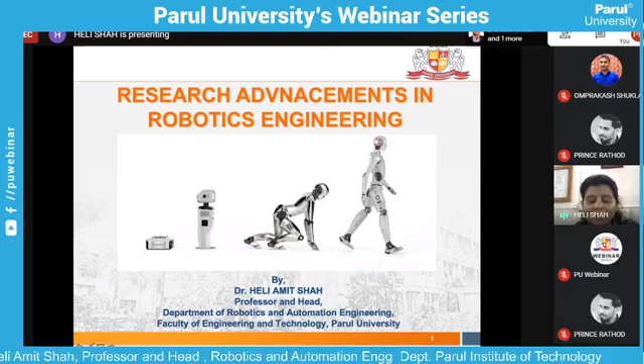The topic for today's presentation is research advancements in robotics engineering. As we can see in the diagram, there is a small two-legged robot, then one like a monkey or animal, and then one like a human. So just as humans have advanced, robots have also advanced from a small machine to a humanoid robot. That is what we are going to see today in today's session.

Before going further, I would like to tell you what is a robot. The word robot was coined by a Czech novelist, Karel Čapek, in 1920, in a play titled Rossum's Universal Robots, RUR. Robot in Czech is a word for worker or servant. So basically, Czech people use it to mean a worker or a servant. It originated from the word robota. So the origin of the word robot is the play and the word robota.

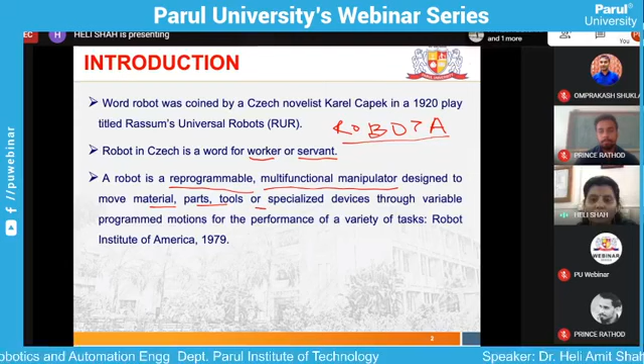But the actual definition of a robot is: it is a reprogrammable, multifunctional manipulator designed to move material, parts, tools, or specialized devices through variable programmed motions for the performance of a variety of tasks. This definition was given by the Robot Institute of America in 1979.

At the same time, Asimov also gave the laws of robotics. On the basis of these laws, the robot has to behave. People designing robots have to see and design the robots based on these laws.

The first law was invented, and then the 0th law came into force. That law states that a robot may not injure humanity or, through inaction, allow humanity to come to harm. So whatever you are developing as a robot, it should not injure humanity. Law 1 states that a robot may not injure a human being or, through inaction, allow a human being to come to harm, unless this would violate the higher order law.

Law 2 states that a robot must obey orders given to it by human beings, except where such orders would conflict with the higher order law. That means if a human being tells a robot to injure a second human being, the robot must not obey it, because it violates Law 1.

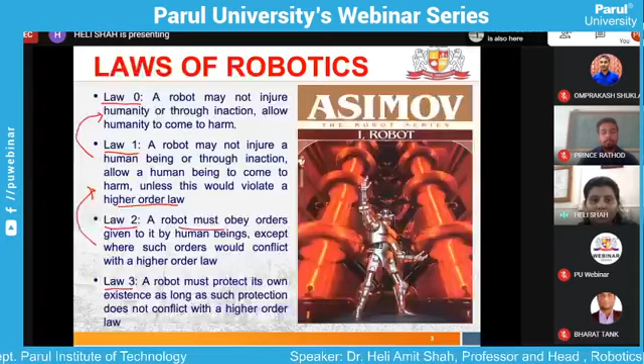When was the first robot developed? Actually, the idea of a robot existed years ago, but the first actual programmable robot was developed in 1954, designed by George Devol. George Devol is known as the father of robotics, who coined the term universal automation. He later shortened this to Unimation, which became the name of the first robot company, in 1962.

The first robot made by him, as shown in this diagram, is known as Unimate. Unimate is basically automated. It originally automated the manufacture of picture tubes. So this was the first programmable robot.

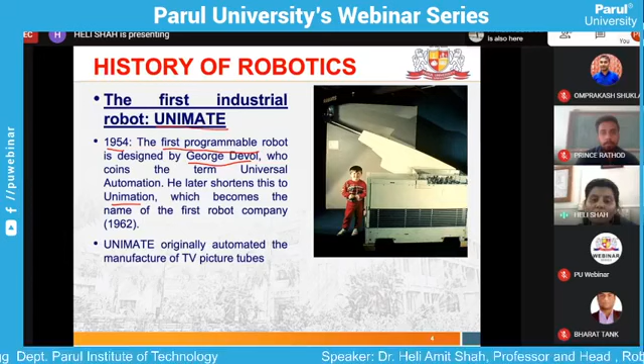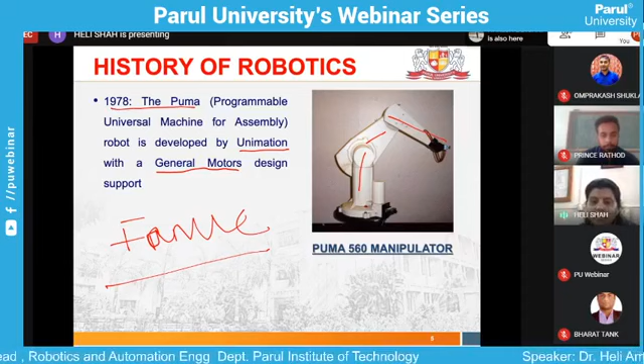In 1978, Puma, Programmable Universal Machine for Assembly, was developed by Unimation, with the help of General Motors as well as Fanuc. Fanuc along with General Motors developed the robot Puma, which is shown here. This robot is just like a human arm and it acts as a human arm.

Then in the 1980s, the robot industries entered the phase of rapid growth. You can see here, this is a SCARA robot, then this was In-Sight robot, then it was the technology manipulator, Barrett technology manipulator, and from then onwards, many institutions introduced programs and courses in robotics.

Robotic courses are spread across mechanical engineering, electrical engineering, and computer science departments. From the 1980s till 5-6 years ago, robotics was not a specialized branch, but was part of either mechanical engineering, electrical engineering, or computer science department. Nowadays, we have robotics as a specialized branch of BTech.

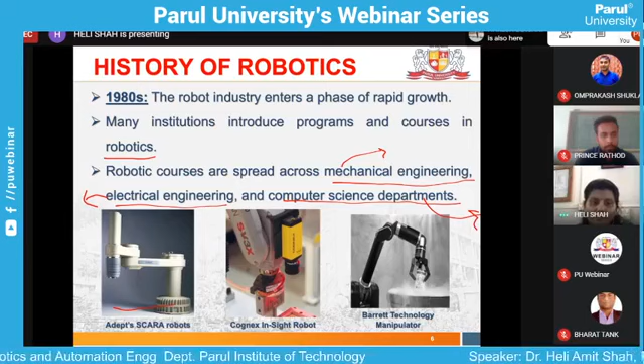Then in 1995, there were so many emerging applications in small robotics and mobile robots, which drove a second growth of startup companies and research.

And in 2003, robots went to space, where NASA's Mars exploration rovers were launched towards Mars in search of answers about the history of water in Mars. You can see this diagram, this is the space robot which was developed by NASA.

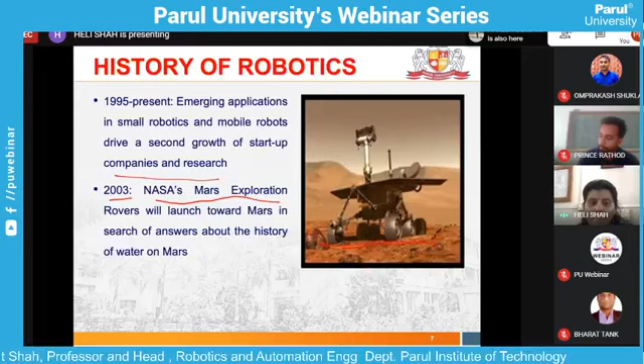If I want to learn robotics, what knowledge should any student or person who wants to work in robotics have? He or she should be capable enough in modeling and analysis of dynamic systems, feedback control, sensors and signal conditioning, actuators and power electronics, hardware and computer interfacing, and computer programming.

These first two things deal with control theory or control system theory. Sensors and signal conditioning deals with instrumentation, controls, and electronics. Actuators and power electronics deals with electrical and electronics. And these two are interdisciplinary, combining computer electronics and electrical.

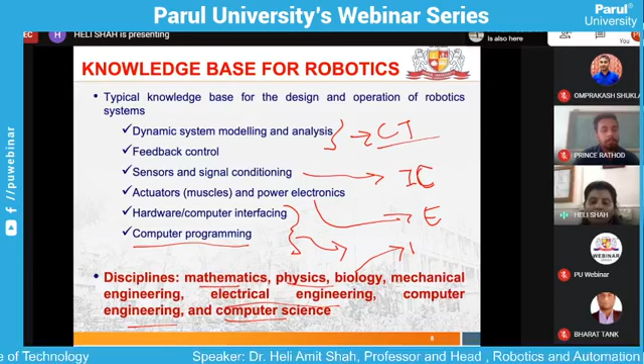So if I want to develop a robot or work with a robot, I should be good enough at mathematics, physics, mechanical engineering, electrical engineering, computer engineering, and computer science. Now biology is also added here because biomimetics and humanoids exist, because of which biology is also added into the knowledge base.

What are the key components of any particular robot? It requires a power conversion unit. If you want to convert from AC to DC, or from DC to AC, you need a power conversion unit, which is a main component of a robot. Sensors, actuators, controller to control the robot, user interface to give commands by the user, and the manipulator which manipulates the actions of the robot.

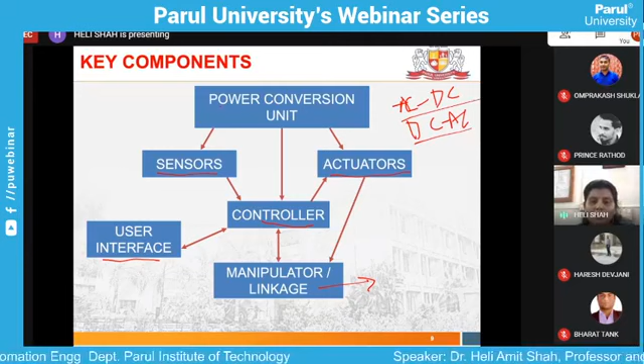When we talk about robots, there are two kinds: a fixed robot and a mobile robot. You can see here in this diagram, this is the fixed robot. These robots can be used in manufacturing companies or companies where you have assembling work, work which a robot can do by sitting or staying at one particular place.

Then we have mobile bases, which can be achieved with the help of wheels, or with the help of legs, or with the help of tracks. And we can say that these robots can move anywhere and they can work accordingly.

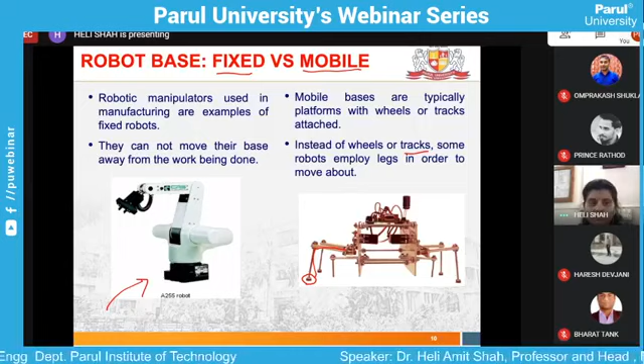Which sensors do we require if I want to build a robot? If I talk about the 5 basic senses of a human being, what we have are eyes, ears, nose, skin, and tongue. Similarly, sight that is eyes, sound, touch, taste, and smell. These are the senses which we have.

Similarly, apart from these 5 senses, robots should have the ability to see in the dark. Also, it should have the ability to detect tiny amounts of invisible radiation, because if I want a robot to work in a hazardous area, it should also measure movement that is too small or fast for the human eye to see.

When there are rapid things happening in front of our eyes, we cannot measure those things precisely. Similarly, a robot should be able to measure such things. The robot sensor should be sensing the environment around the robot, sensing obstacles, sensing the presence of toxic gas, arm position, anything. For that, we have different sensors available.

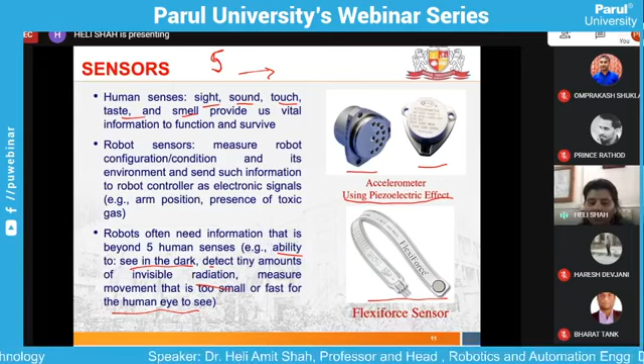Then we have flexiforce sensors, which are there in robotics. Then we have vision sensors. In-sight vision sensors are also there, and 3D vision sensors are also there to sense the vision. They are basically used to pick bins and perform inspection. For pick and place robots also we can use the vision sensor.

For part picking, a robot can handle vision sensor workpieces that are randomly piled by using a 3D vision sensor. So whatever pieces are randomly placed here, here, here, a robot having a vision sensor can take all the pieces and pile them anywhere. This can be constructed at very low cost.

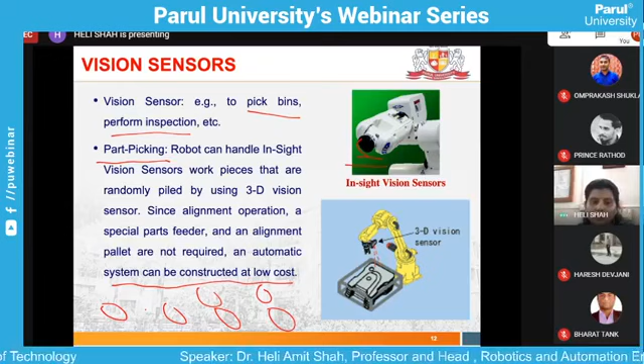Then we have the force sensor. Robots are used in surgery, robots are used in part fitting. When they are used in surgery, we need to fit something into the human body, so that is insertion of something or fitting some part. For that we can use the force sensor, which can apply adequate force for inserting something into the human body. So for that, a robot can do precise fitting and insertion of machine parts also.

If I have a very small gap, my fingers would not be able to handle those small materials because they may slip out of my hand. And if there are large materials, I am not capable enough to handle very large or huge materials. At that point, if a robot can hold those small or large materials and insert it inside the machinery, or inside the human body, it would be very much helpful. So for that we need a force sensor.

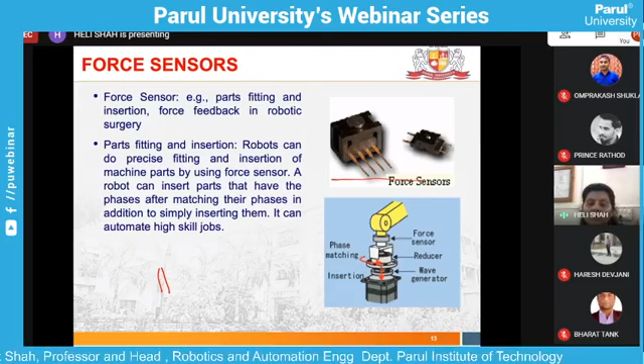Then there are proximity sensors. Now what is a proximity sensor and where are proximity sensors used? Proximity sensing is the technique of detecting the presence or absence of an object with an electronic non-contact type of sensor. You can see these are proximity sensors and they have ultrasonic range. With these sensors, we can detect either the presence or absence of any object.

With this sensor, this particular car is being built. You can see in this car there are 6 proximity sensors. These are the 6 proximity sensors you can see here, these lights. You can see here the sensors, these 3 plus these 3, these are the 6 sensors. So 6 ultrasonic sonar transducers explore wide open areas, and you can detect an obstacle from 15 centimeters to 3 meters, which is a wide range.

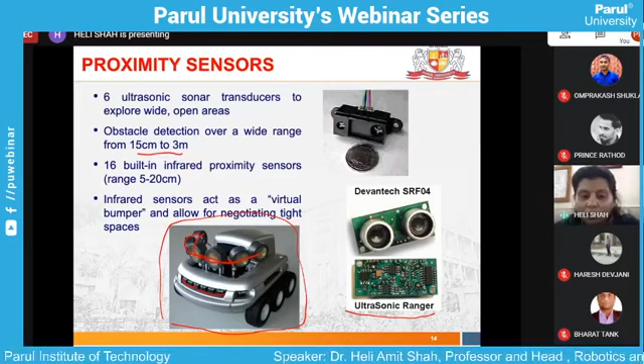And you have infrared proximity sensors. Why infrared? Because they act as a virtual bumper and allow for negotiating tight spaces. So if a car has this kind of sensors, we can avoid collisions, because sensors will sense an object and give the signal, so there will not be any kind of collision.

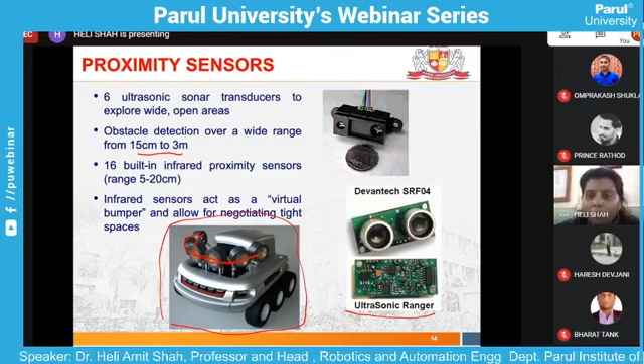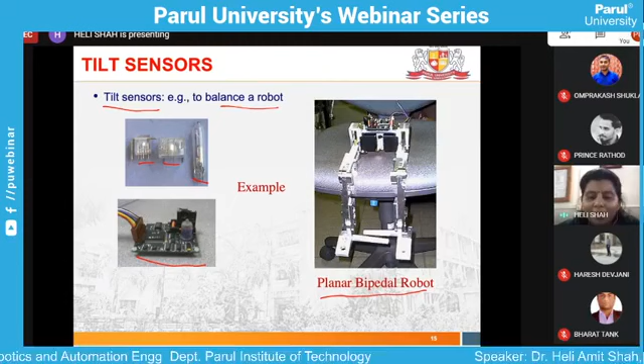Then we have tilt sensors, which balance a robot. When we are talking about a humanoid or a robot doing some particular work, this is a planar bipedal robot which employs this kind of tilt sensors. These tilt sensors are there and they can balance a particular robot.

Just as the human body has muscles, similarly robots have actuators which utilize combinations of electromechanical devices like synchronous motor, stepper motor. This is the AC motor, AC servo motor, brushless DC servo motor and brushed DC servo motor. These are employed particularly for having rotary movements in the robot, for having some particular speed conversions in the robot. So we need actuators.

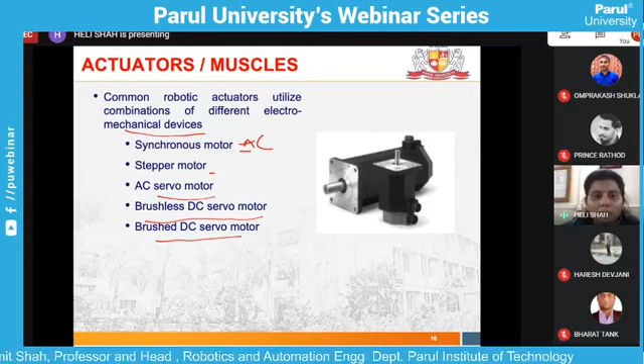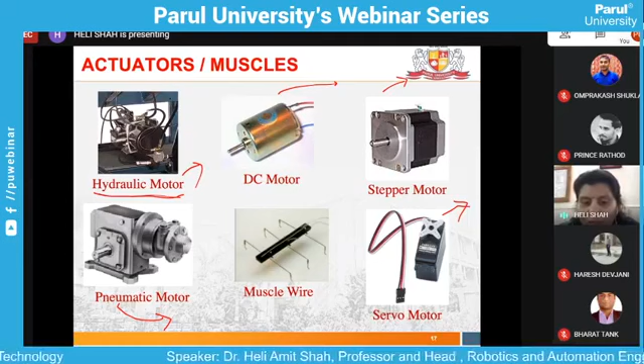These are the common actuators which are used: hydraulic motor for high power applications, pneumatic motor for low power applications, and very widely used motors in robots are DC motor, stepper motor, and servo motor. These motors can be used in a robot for any application where you don't require high power, and these electric motors will give high efficiency. These are the wires with which we can fit in the robot.

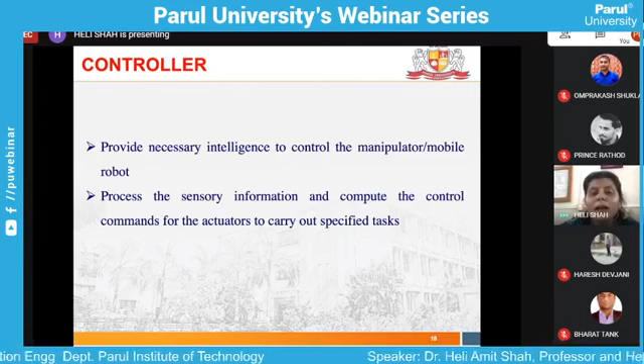By inserting all these elements, we also should have the controller to control all this, which provides the necessary intelligence to control the manipulator or a mobile robot. We need to control a particular robot, and this can be done by a controller. There are different kinds of controllers available these days for a robot. We can control it using Firebird, Arduino Uno, or ARM Cortex controller. These are some of the devices.

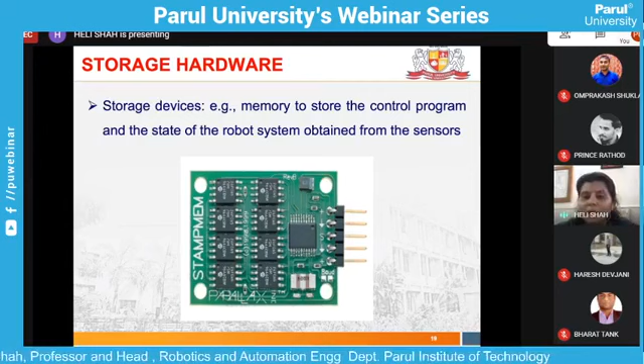Since robot is a programmable device, we also need some kind of storage, because we will store our program in the storage device, then it can be loaded into the controller, and the robot can execute a particular task. So we can have memory to store the control program and the state of the robot system obtained from the sensors. Then we can have computational hardware which does all the computations, all the controls of the robot.

This is the PIC controller. Instead of this PIC controller, we can have 8051. Instead of this 8051, we can also have Firebird. So we can have any particular controller depending upon our application.

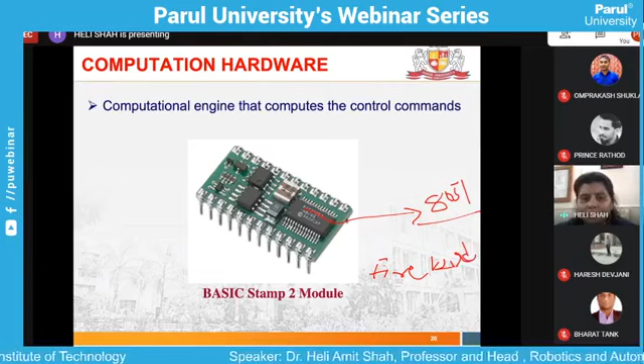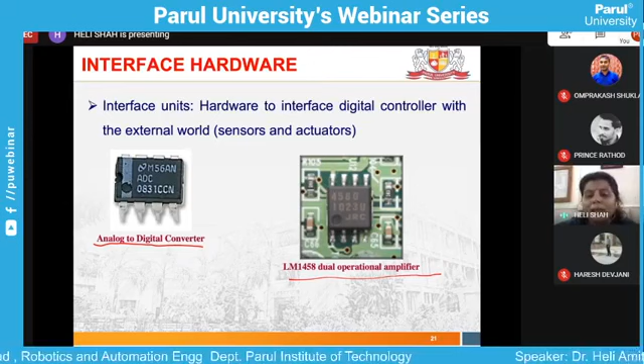Then there is some interface hardware, because whatever sensors give us is an analog signal. We need to convert that analog signal to digital signal using ADC, and then we also need an operational amplifier, particularly to do some particular operation, like amplifying the signal, adding up two signals, or doing differentiation or integration of a particular signal.

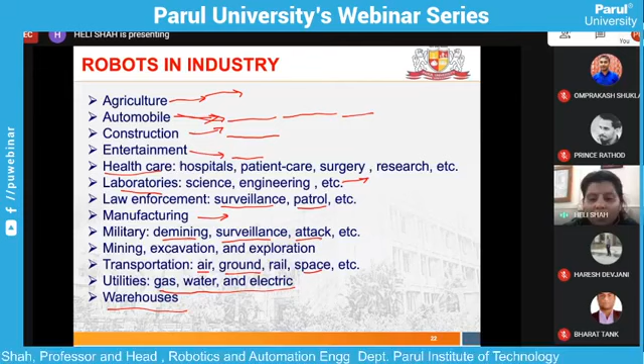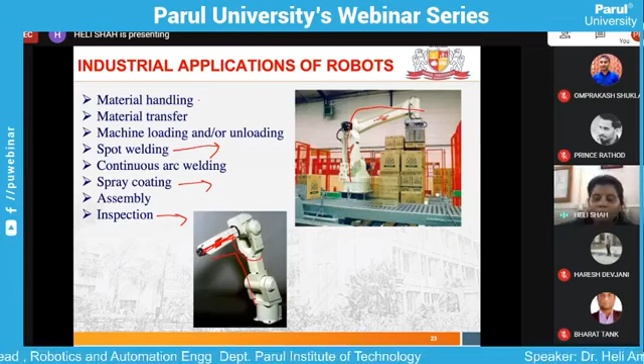What is the advantage? We can send robots to explore space without having to worry about their safety. We want them to last for so much time in space, and we need them to stick around long enough to investigate and send us information. But even if this fails, the humans involved with the mission will stay safe.

So we are not harming the life of a human being by sending a robot to space. Again, it is very much cheaper than sending a human. Why is it cheaper? Because a robot doesn't need to eat, sleep, or go to the washroom. They can survive in space for many years and can be left out there, right? No need for a return trip. So it is so much cheaper to send a robot to space than to send a human being.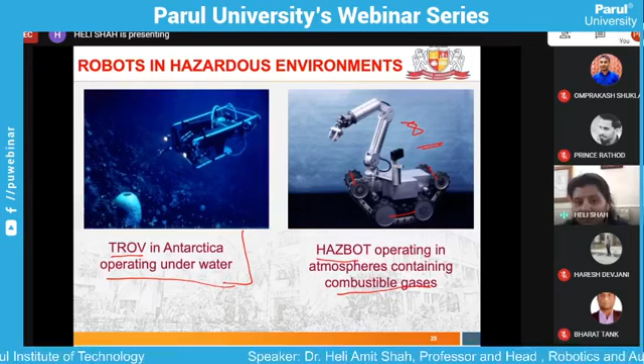Then this is the Hazbot. You can see it here. Why is it called Hazbot? Because it has 6 wheels and 2 at the back, so there are totally 8 wheels. It operates in atmospheres containing combustible gases, where human beings can't survive. So the places where human beings can't survive, robots can very well go and work.

Medical robots - see, this one uses a force sensor. It is the robotic assistant for microsurgery. This is a small part which has to be inserted inside the human body, and this can be done with the help of a robot hand.

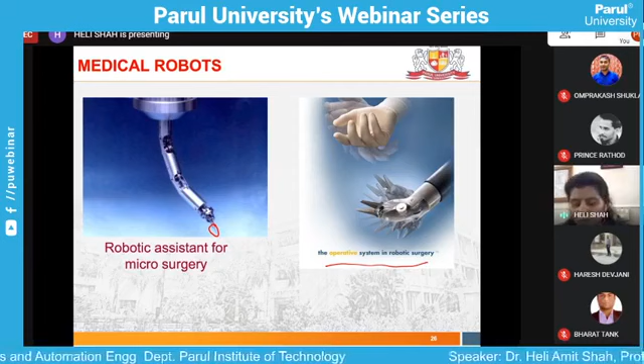Similarly, the operative system you can see is just like a human hand, and this has been done with the help of a robot. You can have surgery with the help of a robot.

Then in the military, these are used for strikes. Deployed from a sub's hull, Manta could dispatch tiny mine-seeking AUVs or engage in more explosive combat. This was Predator, Global Hawk, Golden Eye, and I-Star. These are used extensively in the military.

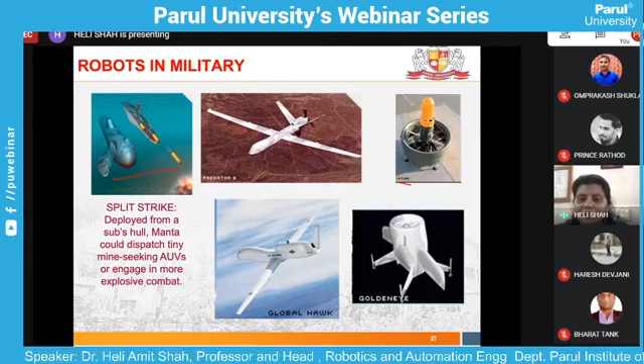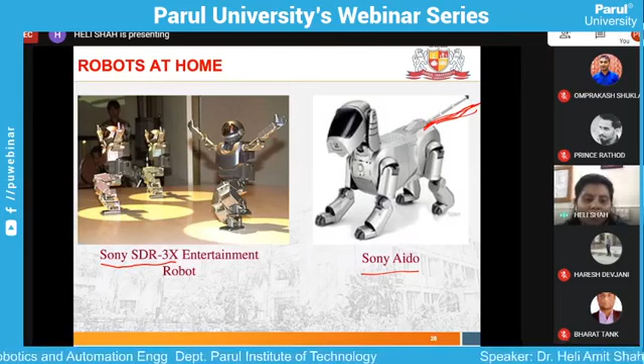Then at home, this is the entertainment application. Sony has developed SDR3X, which is an entertainment robot. And this is another one, Sony Aibo. You can see this is a transmitter. So you can employ these anywhere and they will provide your entertainment. These are the entertainment robots.

Then the most important thing, which came from 2016 and 17, humanoid robots. The first humanoid robot was Sophia, a social humanoid robot developed by the Hong Kong-based company Hanson Robotics. It was first turned on February 14, 2016, and made its first public appearance at the South by Southwest Festival in mid-March 2016 in Austin, Texas. So the first public appearance of Sophia was in 2016.

In 2017, Sophia became a Saudi Arabian citizen, thus becoming the first robot to receive citizenship of any country. Sophia is the first robot to receive citizenship of any particular country.

Then our own Indian robot, Mitra. Mitra is a humanoid robot developed by the Indian startup Invento Robotics in Bangalore, and it was founded by Balaji Viswanathan. It made its first appearance in November 2017 at the Global Entrepreneurship Summit, where it greeted Ivanka Trump, senior advisor to the US President, and also interacted with Indian Prime Minister Narendra Modi. Since then, we all know the journey of Mitra.

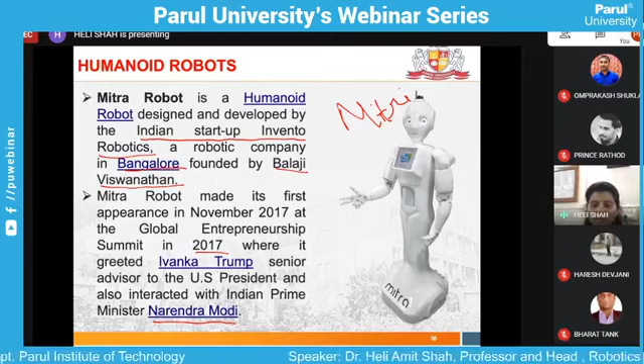Then in 2020, we had the worst phase of our life wherein COVID-19 caused disasters across the entire world. At that point, robots were so much of help and use. Different countries used robots in COVID-19 - almost 16 countries used robots in public safety, public works, and non-clinical public health. They also used them in quarantine enforcement, disinfecting public spaces, and identification of infected persons.

How do they do this thing?

They do this with the help of testing, public service announcements, and monitoring traffic flow.

There were about 7 countries who use robots extensively in clinical care. This is where robots are used extensively, though slowly and gradually the use has decreased here. This includes disinfecting the point of care, meaning disinfecting the entire hospital, healthcare worker telepresence where a robot can make a video call to a healthcare worker, prescription and meal dispensing, patient intake and visitors, and patient and family socializing. This is what robots were doing.

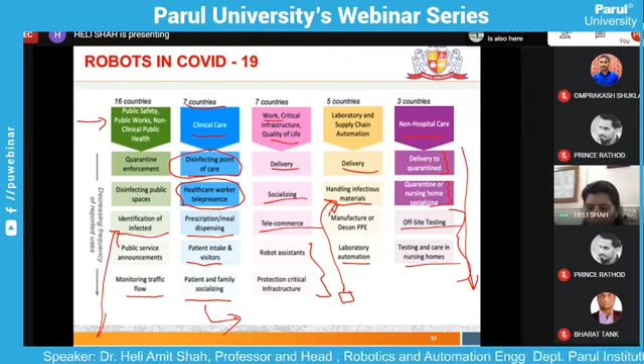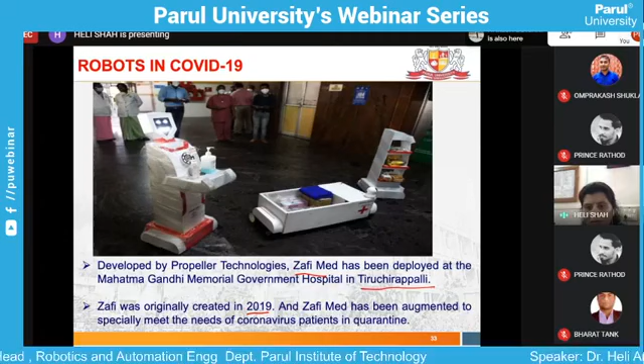Then this was the Zafi Med, developed by Propeller Technologies, deployed at the Mahatma Gandhi Memorial Government Hospital in Tiruchirappalli. It was originally created in 2019, but was augmented to specially meet the needs of coronavirus patients in quarantine. You can see it can take things from these particular cupboards and serve them to patients.

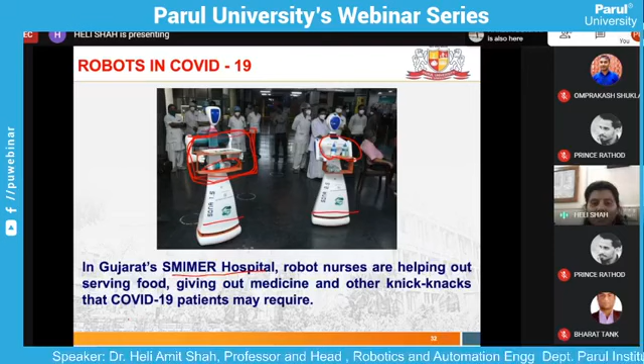Now if you see these Mitra robots, some of them have screens over here. Because of these screens, the Mitra robots can interact with humans admitted in the hospital, and they can socialize with their family members also.

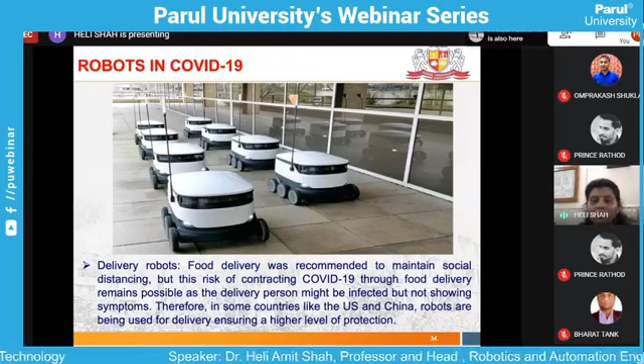Then these are the delivery robots used in COVID-19. You can see they have big tanks, and food delivery was recommended to maintain social distancing. But the risk of contracting COVID-19 through food delivery remains possible, as the delivery person might be infected but not showing symptoms. So in countries like the US and China, robots are being used for delivery, ensuring a higher level of protection, because we never know if the person coming for delivery is infected or not, right?

Then drones in the form of robots were used in various countries to monitor and disinfect the streets during lockdown. In Spain, police flew drones with speakers around public places to warn citizens about the coronavirus lockdown. In UAE, drones are being used to disinfect pavements and public squares. So we can say they are used for disinfecting, and even for monitoring the public.

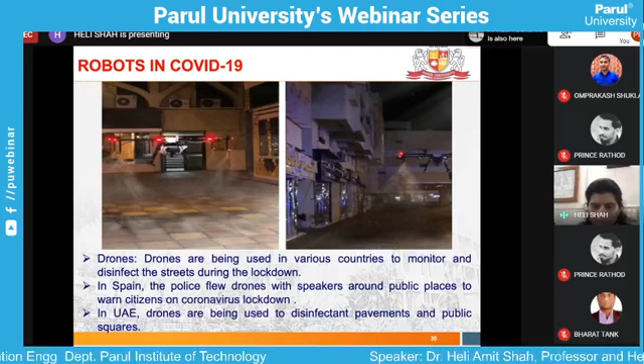These robots are used in surveillance for monitoring streets during lockdowns. In Tunisia, surveillance robots are being used to patrol the streets during lockdown, asking pedestrians passing by to show their ID to enable police officers to check if they have permission to be out under the nationwide lockdown announced by the government. So this is robots used for surveillance.

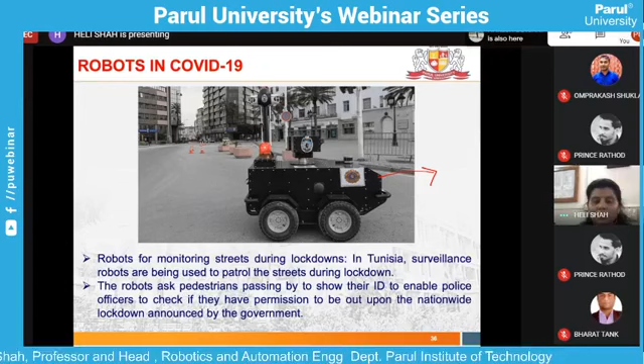You can say that humans are picking the things, making something. And here is a new technology where robots cope with the constant change and irregular shapes that humans encounter at work. This was a robot, Foodly, which is a collaborative robot.

Foodly is a collaborative robot known as a Cobot, developed by RT Corporation, using advanced vision algorithms and a grasping hand. You can see the grasping hand placing pieces of a food item into a bento box. This is a Cobot, known as the collaborative robot.

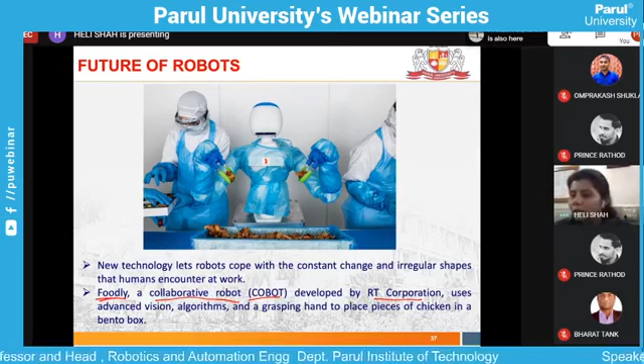In Manila, near 200 high school students took turns teleporting a tall-wheeled robot developed by the school's robotics club to walk on stage during their graduation ceremony. So this is the virtual graduation ceremony, done by the robots.

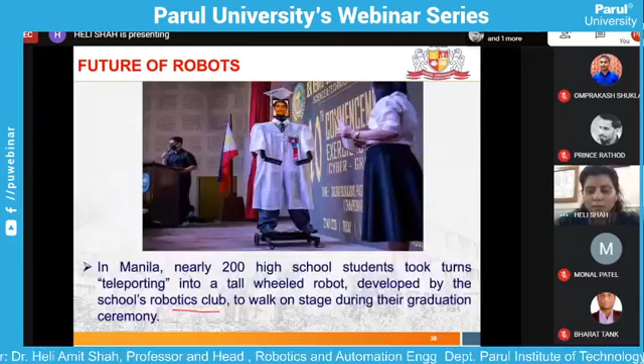The exoskeleton was manufactured by a Japanese firm called Cyberdyne. It consisted of two connected tubes that curved across the back - you can see these, the white tubes - and a belt at the waist and two straps on thighs. It feels like being strapped into a parachute or an amusement park ride.

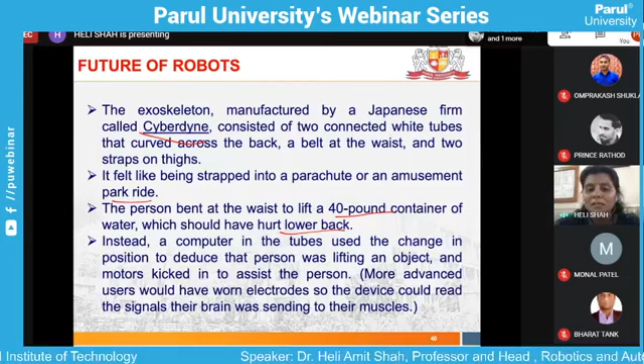The person bent at the waist to lift a 40-pound container of water, which should have hurt the lower back. Instead, a computer in the tubes used the change in position to deduce that the person was lifting an object, and motors kicked in to assist the person. So you can pick up so much weight with the help of the exoskeleton.

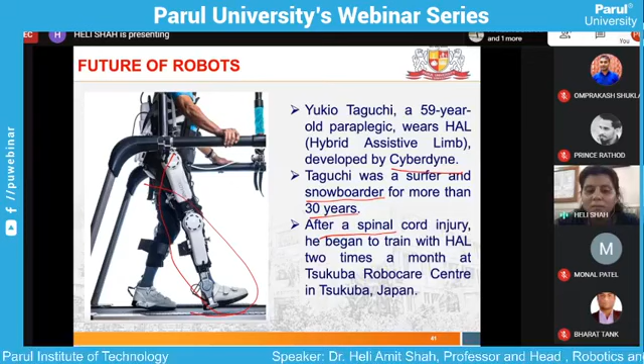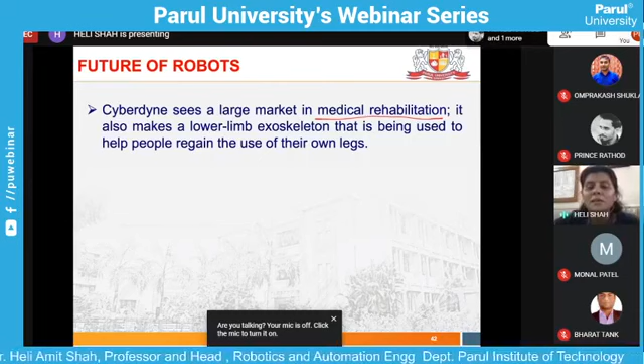He trains two times a month at the RoboCare Center and was able to do his own work with the help of this limb. This is also research advancement in robotics. Cyberdyne sees a large market in medical rehabilitation - it also makes a lower limb exoskeleton being used to help people regain the use of their own legs. Nowadays we even have exoskeletons made for the arms, which are prosthetic limbs.

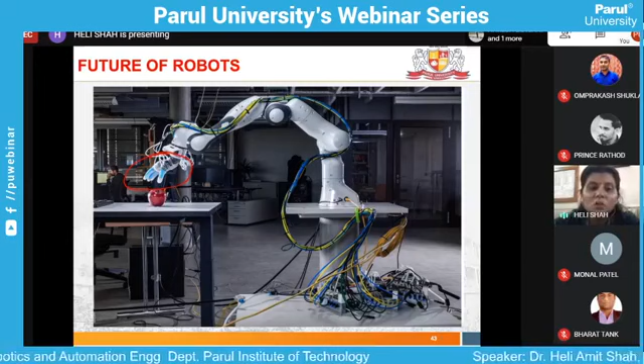This is the exoskeleton made for the arms. You can see a robot trying to grasp a thing, just as a human can do, for an uneven shape of the object. Grasping objects and manipulating them are crucial skills for robots because they don't have hands like us, with movements of hands like we do. Human hands are more sensitive and nimble than any robot, but machines are improving.

This is just a mimic of the human hand - I think you all have one more session on biomimetics where you can see more of these advancements. Using fingers inflated with compressed air to mimic a human hand's soft touch, this robot at the Technical University of Berlin picks up an apple, as shown here.

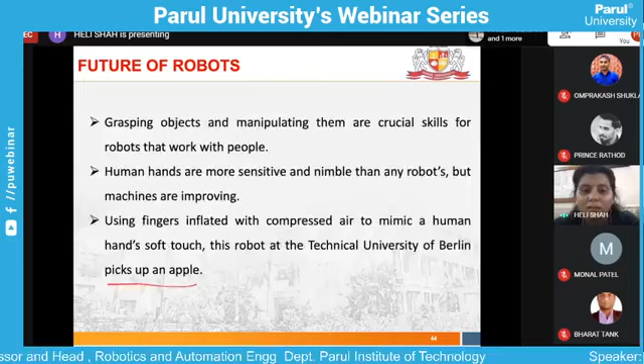The soft silicone pneumatic actuator is here - these are the air chambers, and the air comes in here. This is the surface for contact, made up of rubber. These are the radial fibers which help the fingers maintain their shape when inflated. This is the opposable thumb, and when you want to release, there is one acoustic sensor which tells you to release.

First, the robot will identify the target. It detects the target with the help of a camera sensor and tells the robot's brain that there is a target. Then pressurized air from a compressor activates these fingers, allowing them to curl and straighten as required, just like the human hand controlling any object.

The fingers mold around the object for a firm grip, then manipulate it for the particular grip and interact with it. Soft robots are safer than rigid metal ones when it comes to working with humans.

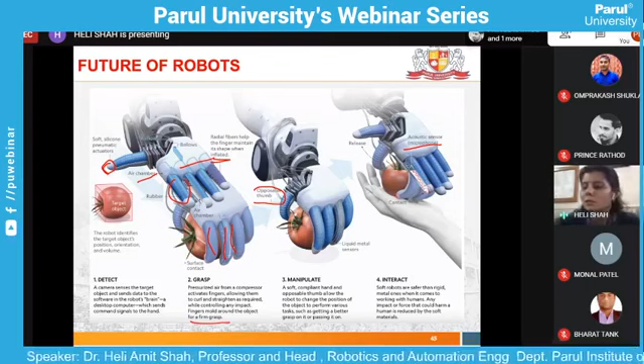So if you want this robot to work with humans, you can do that. For instance, it could have a vacuum grabber, a gripping tentacle, flexible flaps, a high speed claw, a humanoid hand, and now we even have a biomimetic hand. This is the progression from the normal robot arm towards the human arm.

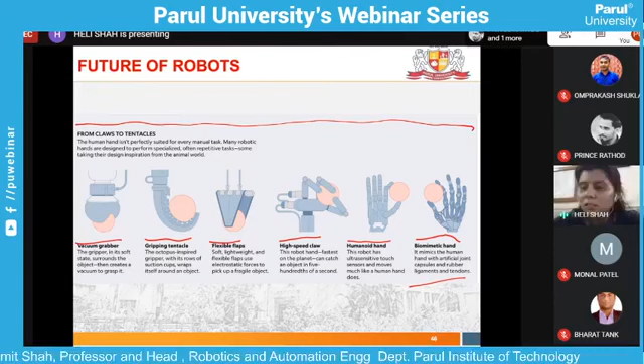The first thing was the vacuum grabber—you can see it holding an object. Then it was the tentacle. Then a flexible flap which can open or close so a person can hold it. Then a high speed claw with 3 fingers. Then a humanoid hand which can hold things, and finally the biomimetic hand which mimics the human hand. This is what we have as the future of robots.

Now see here, at Fluidics Instruments in Netherlands, this employee works with 7 robotic arms to assemble parts for oil and gas burners. Like traditional factory robots, these cobots—collaborative robots—are efficient and precise, producing 1,000 nozzles per hour. But unlike older machines, they adapt quickly to changed specifications or a new task, which is very good since being cobots, they can adapt quickly to changes.

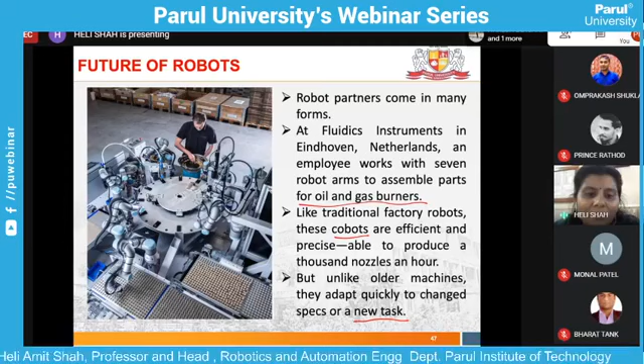Now this is a medical healthcare robot in Dallas. Nurses work with Moxie—that's the robot's name—just as Mitra was working here in India. It's a robot built to learn and perform tasks that take nurses away from patients, such as fetching supplies, delivering lab samples, and removing bags of soiled linens.

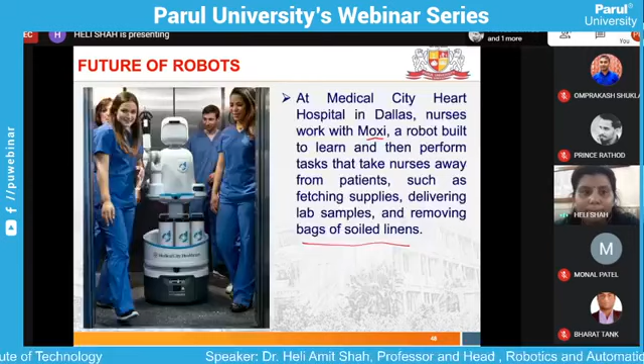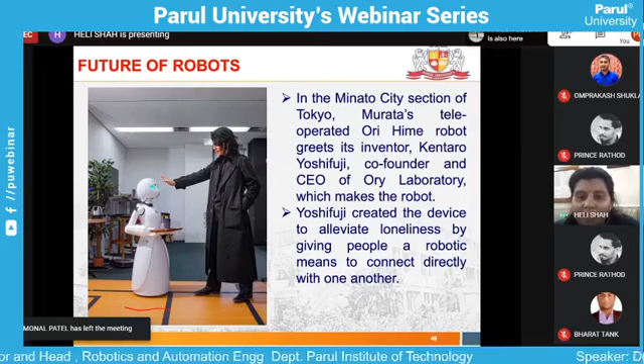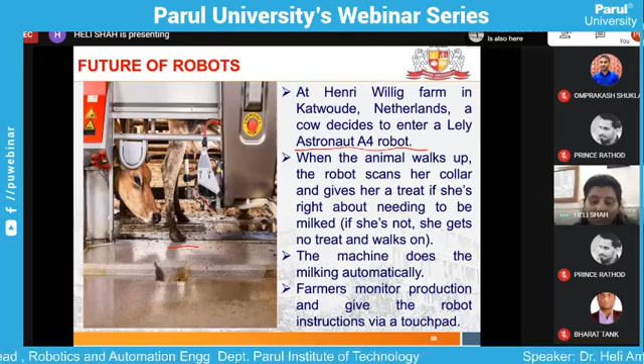So now at this juncture, what I can say is that robots have replaced human beings.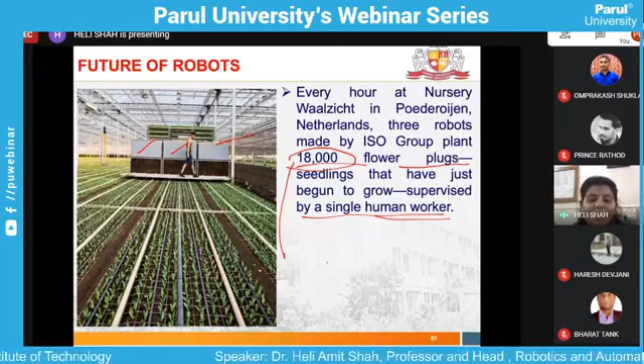Robots have worked in so many areas just as human beings, but they cannot replace the human being because they can do well-defined tasks, but none has mastered humans' ability to multitask or use common sense as humans can. So we can have robots to help us, but we cannot have robots just to replace us. That is what we can conclude. Now I would be happy to address any queries if anyone is having.

Before that, I just wanted to highlight some things about my department. We are working in the Robotics and Automation Engineering Department at Parul University, doing research and development in the field of robotics. At this juncture, we have an intake of 60 students in Robotics and Automation Engineering. So if anyone is interested to visit the labs in the department, they are most welcome at the university. Thank you.

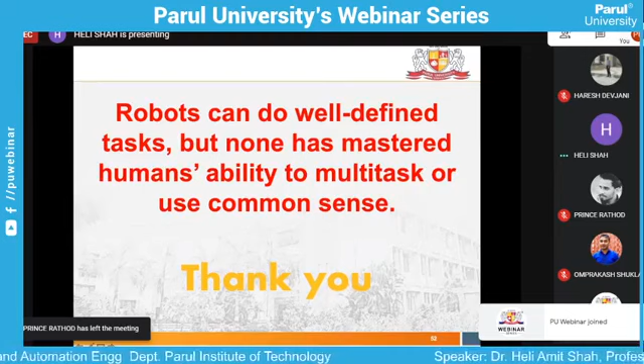Can I leave, sir? Yes ma'am, yes, okay, okay.